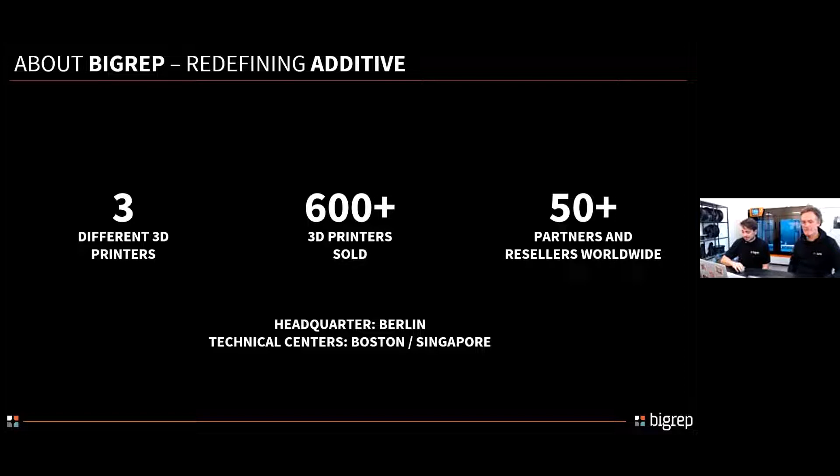First of all, we'd like to talk a bit about BigRep in general. BigRep currently has 3 printers out there in the market, and we have more than 600 actually sold, with around 50 plus among partners and resellers around the world. Our headquarters is here in Berlin, and we have another office in Boston and one in Singapore. So I would say we're pretty global.

About the products, for people who couldn't make it to Formnext, that was visible at the booth. We have, as mentioned, 3 products, but we've developed them for 2 different users. We have the innovation product line with our BigRep One, which during Formnext we presented the 4th generation of. It's not going to be the topic of today, but it's a machine of still 1 cubic meter, very much used for prototyping, for sand casting, for concrete formwork, for people really starting into large-scale 3D printers and trying to bring this technology into their manufacturing process.

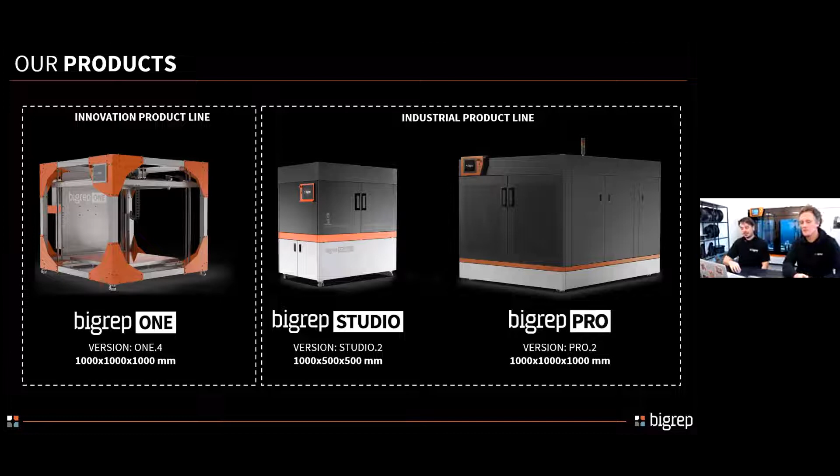On the other side, we have 2 products that are similar but different: the BigRep Studio and the BigRep Pro. The BigRep Studio has a 1000 by 500 by 500 millimeter build volume, so we're talking about 1/4 of the volume of the Pro. Then the BigRep Pro, for which we also introduced a new generation at Formnext. So we're talking about the 2nd generation of the BigRep Pro, again 1 cubic meter, and it's going to be the topic of today.

There is probably no better way to introduce a new product than with a video. So first of all, we're going to show you the promo video that we used to launch the 2nd generation of the BigRep Pro.

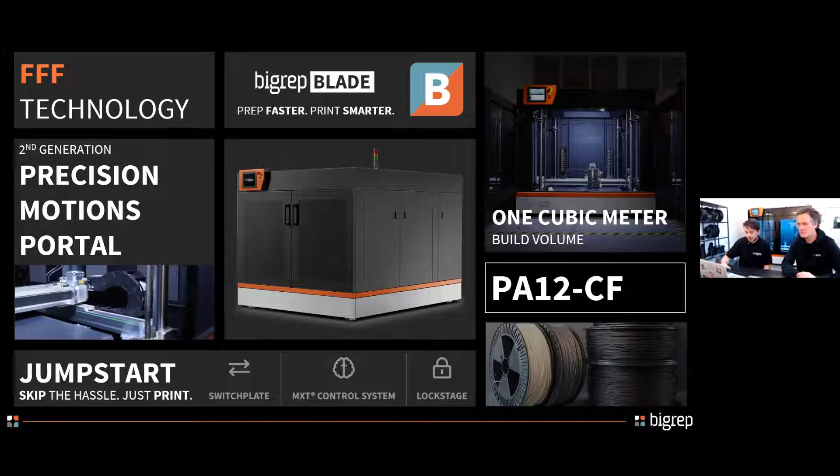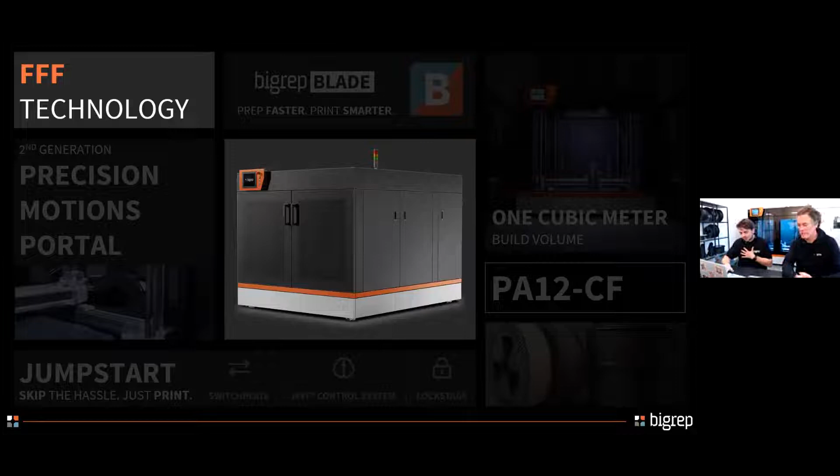First of all, the most basic: our technology is FFF. As you might know, additive manufacturing is pretty big, and there are several technologies out there. The technology we use is FFF, so we basically work, first of all, only with polymers. We're talking about thermoplastic, and we work with layers. So it's an additive technology, and we extrude layer by layer the parts that we want to manufacture.

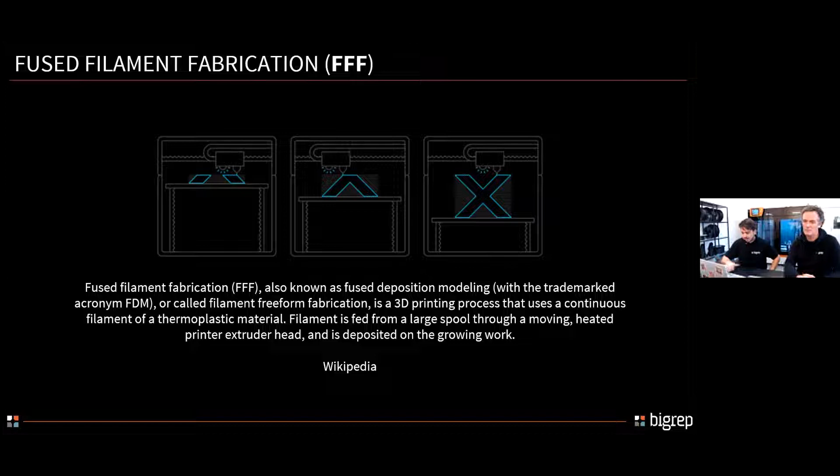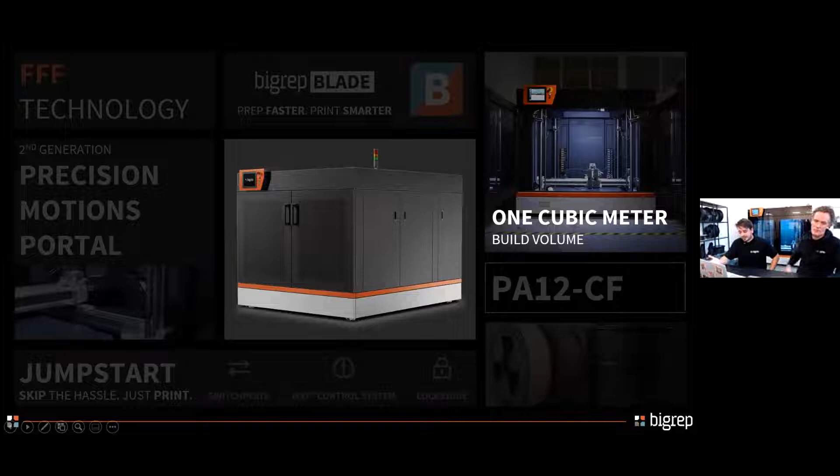Getting into a bit more of the actual spec of the machine, one of the main features is definitely the 1 cubic meter build volume. It's pretty unique, it's big, and it helps us do a lot of things—not just print large parts, but you can also really print batch production, so you can print a lot of smaller parts.

And this gives you a lot of flexibility, right? Because you can really use this agile hardware as you actually need. We focus on different targets, but the industry is so big that at the end of the day, there are always people that come up with new things, and we discover new things with new customers every time.

But we really focus on prototypes and functional prototyping. But not just that, also one of the biggest applications for this machine is actually tooling, jigs, and fixtures. So in the world of automotive, having this machine on the shop floor can really change things, can really speed up the process. And I'm talking about several things, not only jigs and normal fixtures, but also quality assurance, CMM. There's a lot of things this machine can print and support with.

There's also patterns and molds in different industries, so it's pretty generic, but of course, like we mentioned before, you can also print patterns for sand casting or concrete formwork. Here you can push a bit more thanks to the special materials this machine can print. We can also go into the world of carbon fiber, so we can print molds for laminates, or print plugs to then make laminates, molds, glass fiber, etc. And then there's the whole end-use part, as you can see in the picture.

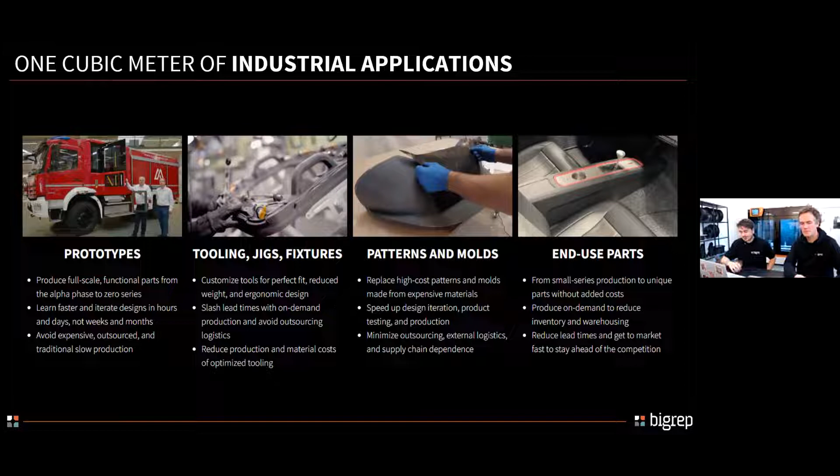Here's just a picture of one of these huge smart fixtures from one of our customers, WAT. It's one of my favorite pieces. Actually, with this one we exhibited at Formnext as well, because it's really a tool that's very complex to manufacture otherwise. So here it embraces all the potential of this technology combined with large scale. This is a smart fixture because it combines not only the parts itself, but a lot of probes, to make sure that the frame where this part is used actually respects the quality enough to not stop the work process, right?

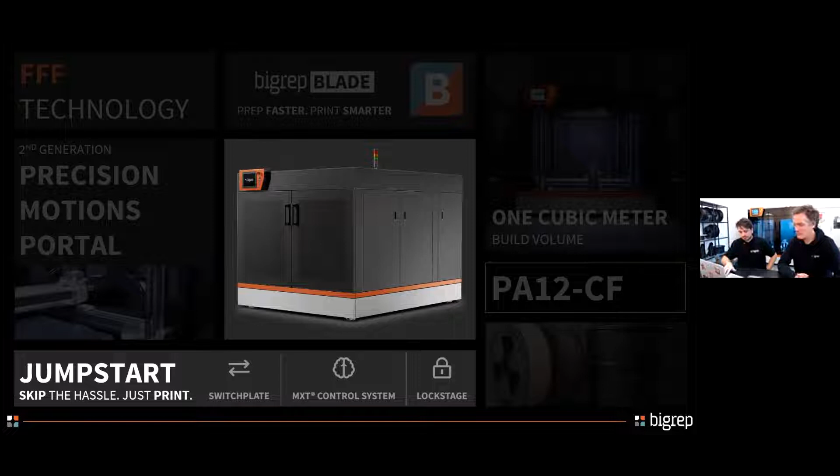Let's then go to the new features of the Pro as well. And here I pass the word to Jan. Thank you, Marco. I'm quite happy to talk about the new features. We were really busy in the past months, half a year and more, to make the Pro a lot more usable, a lot more accessible. And we created what we call JUMPSTART. It allows you to skip the hassle and just print. To achieve that, I'm going to talk about three main aspects which we focused on.

The first one is what we call the switch plate, and you saw that in the video before. That is a surface that helps us have a nice process for having the part on the surface and for part removal.

On the right side, you see the lock stage. Lock stage is what allows us to fasten the extruder to the portal, the moving part, and move it in the build volume. And in the middle is really the brain of the whole thing. We call that the MXT control system. That's where all the algorithms, all the magic, all the sensing, adaptation to the printing happens. We're going to go into some more detail here.

Again, why are we doing this? It's really about dual extrusion. Dual extrusion is the most challenging of applications, but it's also the one that makes for the most versatility. Without dual extrusion, you cannot print with support material, and then you have to design for AM. While we want people to understand that design for AM is very important, there always are applications where you just have to be able to print your injection molding part, or the part is very complex, and having easy dual extrusion here gives you a very high design freedom for your part.

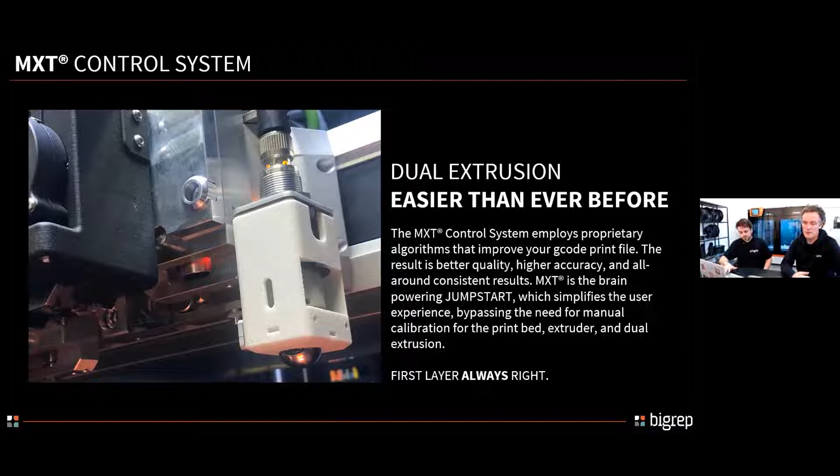There is the switch plate aspect of the whole process, which is interesting in so many ways and improves usability a lot. Before, we had a system where you had to actually apply glue to the build plate before you printed, and it was messy and not very nice.

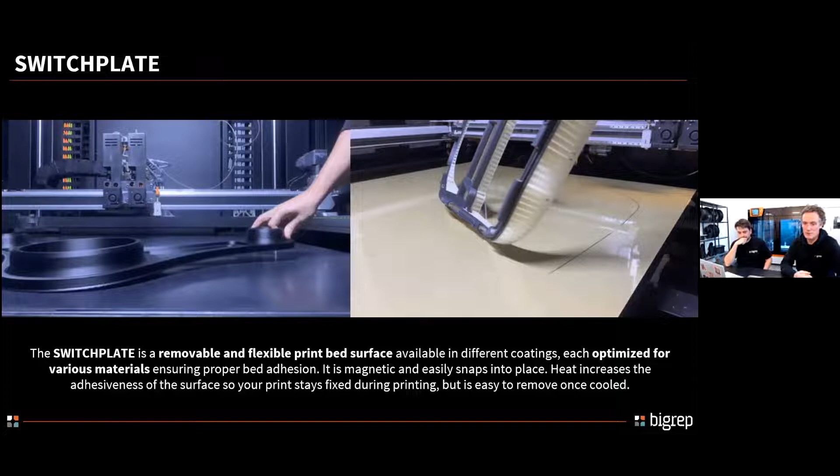Now we have a print surface that has the amazing ability to, when it heats up, become sticky, and it allows the part to stick very strong to the build surface, which makes sure the part doesn't warp, and both the support material and the actual material stick to it really well. As it cools down, at the end of a print, it loses this feature of being sticky, and you see here, you can just lift it off the plate.

All you have to do is lift the plate at the corner a little bit, and that essentially pops the part off the plate, and you can just take it out.

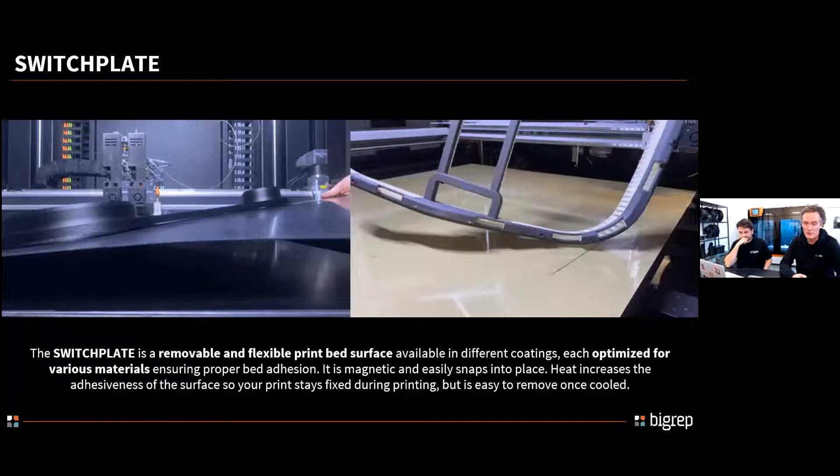This is a big time saver. It allows you to skip a lengthy process of part removal. The whole thing is a lot cleaner. You don't have glue sticking on the surface that afterwards you have to remove. Also, more often than not, you can destroy the part while trying to remove it. Little parts break off, and here it just pops off.

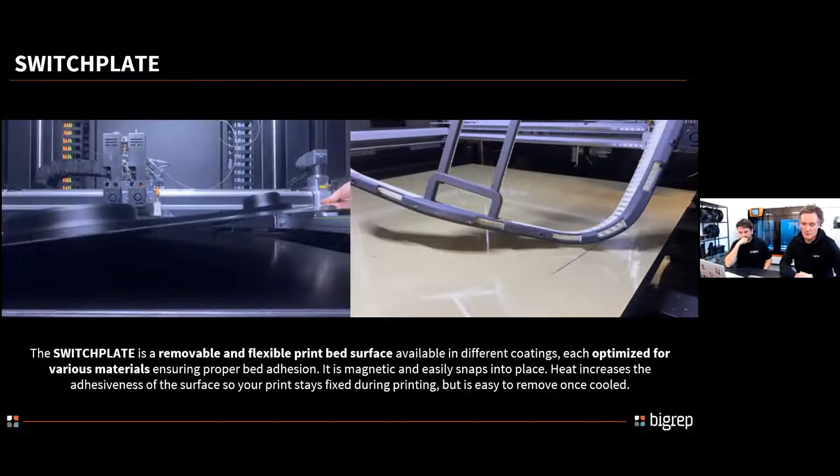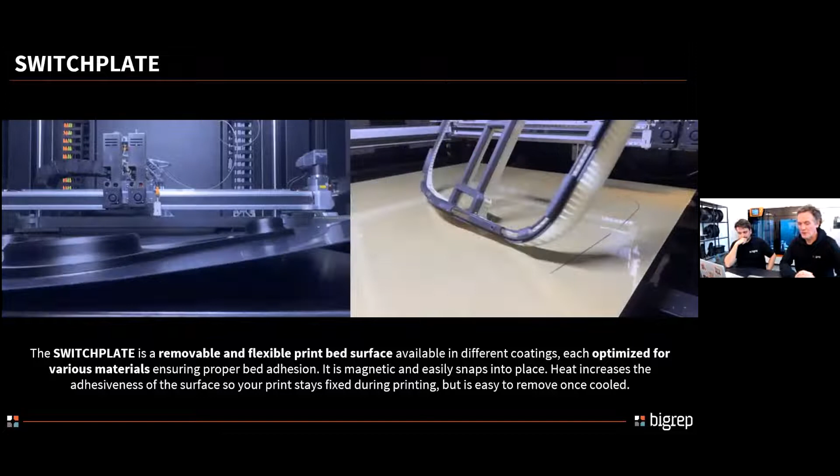What you see in the video is a part printed on the right, I think in high temp CF material, but the thing I want to point out is that the support material is actually water soluble. So in this case, you could break it off easily at the bottom, but if you have more complex structures that are not so easy to reach with tools, water soluble support is really what we want.

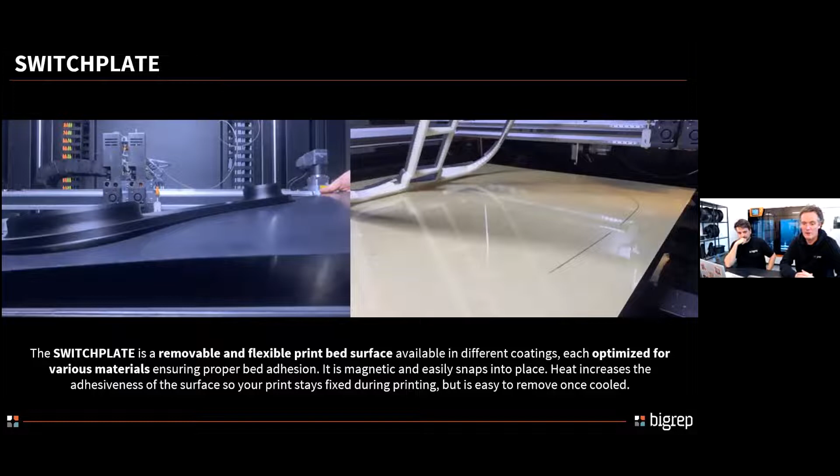And there's a lock stage. For dual extrusion to work perfectly, you need a highly accurate portal, and the way the extruder is moved in 3D space has to be super accurate, especially when you do dual extrusion, where one extruder is essentially printing right next to or on top of what the other extruder just printed.

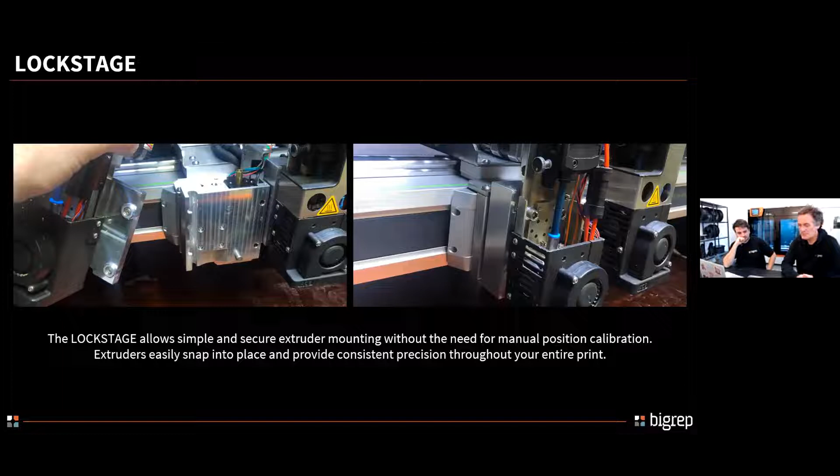And therefore, we developed the lock stage. The lock stage is a way for placing the extruder on the portal and replacing it if needed, and it ensures that the positioning in space is highly precise. You see it's precision machined aluminum here in the back, and just from the way that it's mounted, you already get a very high precision. I will show the quality.

Do we have more? Yeah, let's. I'm going to want to. Do we have a sensor picture?

No, okay. I'm going to talk about the MXT control for a little bit here. MXT control is the control system, it's really the brains of the whole thing.

So there are algorithms in there that ensure the material is placed at very high precision, so the machine basically doesn't require any human intervention and very little setup. We don't need an operator anymore that goes through a lengthy process of setting up the machine, cleaning the build plate, setting up the extruders. The machine does everything for you.

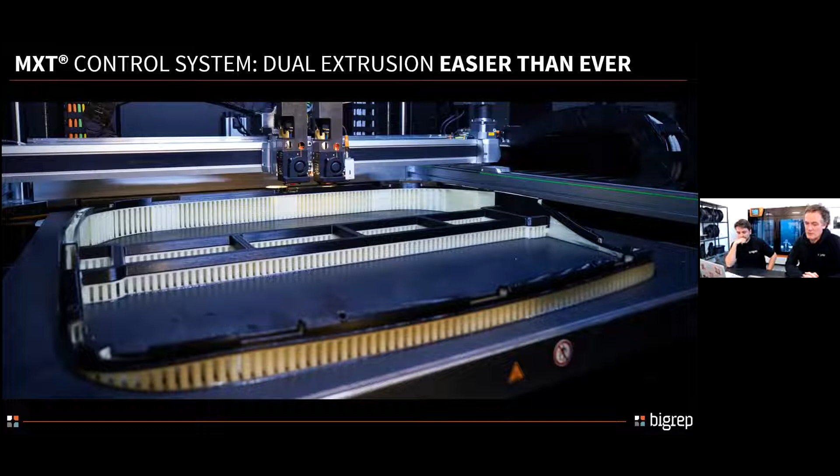We achieve that by having the MXT control system. It is built around the industrial Bosch components that we're using, but we've put a lot of really smart things into it, and that really makes this dual extrusion experience a lot smoother. You can see here the quality that we're achieving. This is a very complex part that we printed, and it wouldn't be possible to print many of the features without support, but it came out super nice.

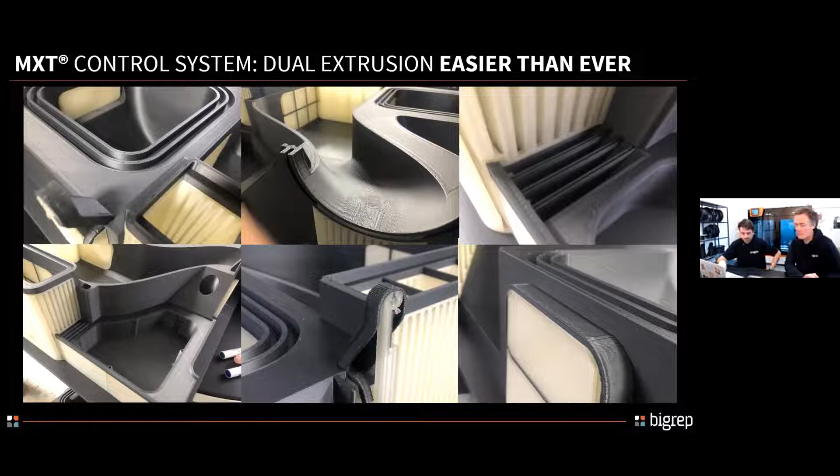And yeah, it's beautiful that you bypass the whole manual calibration. At the end of the day, it just goes like you say. It's wonderful.

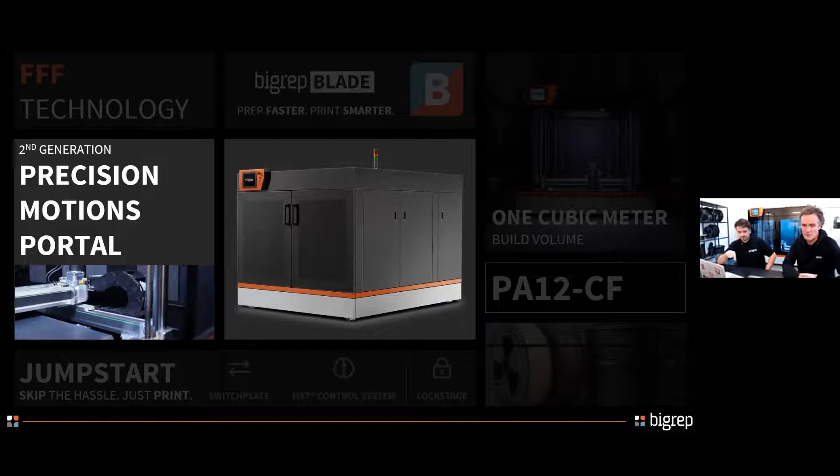Let's also talk about the Precision Motions portal. That is here, next one please. It's the second generation, so this is really the biggest change in the machine that you can see beside the MXT controls. This is the physical manifestation of the precision.

We wanted to achieve a system that is very precise, and the Precision Motions portal helps us there. We made it even stronger than before. It's built around Bosch Rexroth components. The motors, the control system, everything is industrial grade, including safety mechanisms that ensure it stops when you open the doors.

And this keeps vibrations to the minimum. Vibrations you can see in the print result, and that's why it's important to minimize them. It's the part that moves the stage and the extruders around, and it is able to do that at much higher speeds than the previous generation machine.

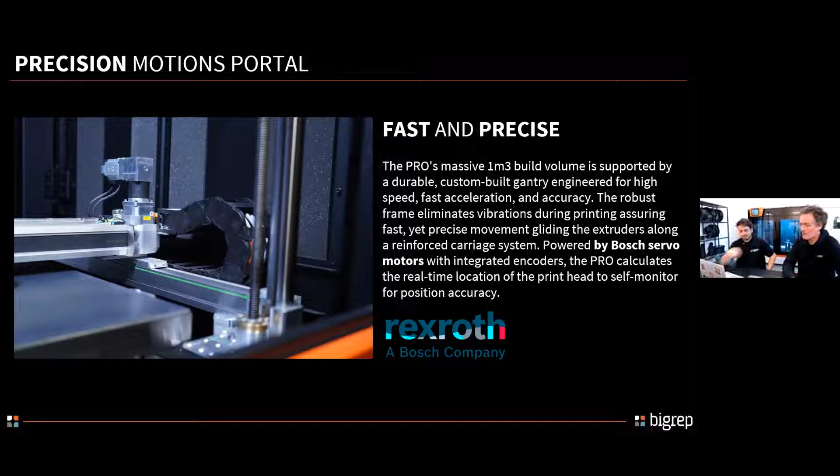And all of this, in the end, translates into achievable accuracy of the part. For the BigRep Pro, we have an achievable accuracy of plus minus 0.2 millimeters. That is very much up there in the ballpark of what other high-end competitors are offering.

There are machines that are a little bit higher in their achievable accuracy, but they also cost a lot more. This is also something that we're constantly improving.

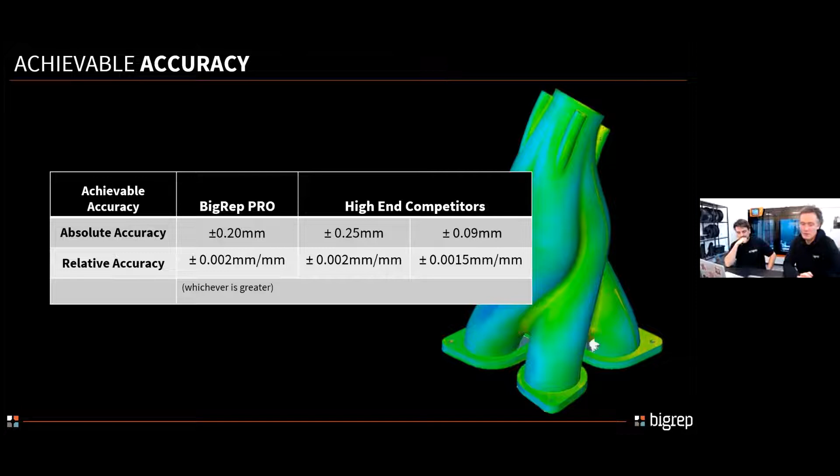The specs which make this possible for the Precision Motions portal is an acceleration of 2 meters per second squared, which is up from what we had before. The control system has an accuracy which is even higher than what we just looked at, and the whole system also has a really high repeatability.

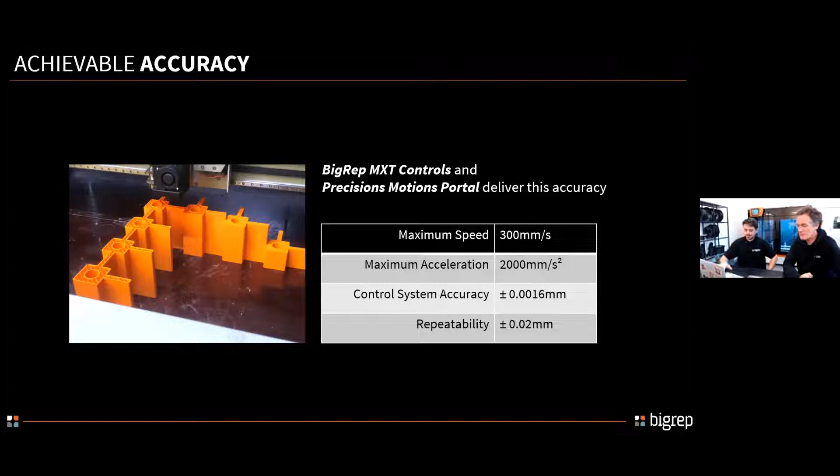Before passing through, I loved how you call it the physical manifestation of precision, which is a very accurate way to describe the portal. You're gonna see it after, but it's definitely beautiful.

About the whole JumpStart, I think it's really amazing how you guys actually solved a lot of the things that, at the end of the day, users want. That's what you really focus on. People realized also, seeing it at Formnext, how easy it was to just start such a dual extrusion complex print in a matter of minutes, because the machine does it.

And then the pop-off, which maybe we saw already with desktop printers out there with a flexible plate, smaller scale, but when you see it in large scale and behaving in that way, it's just beautiful. The part just pops, and you take it off and it's ready to start the print again. People are like, wow, that's definitely impressive to see.

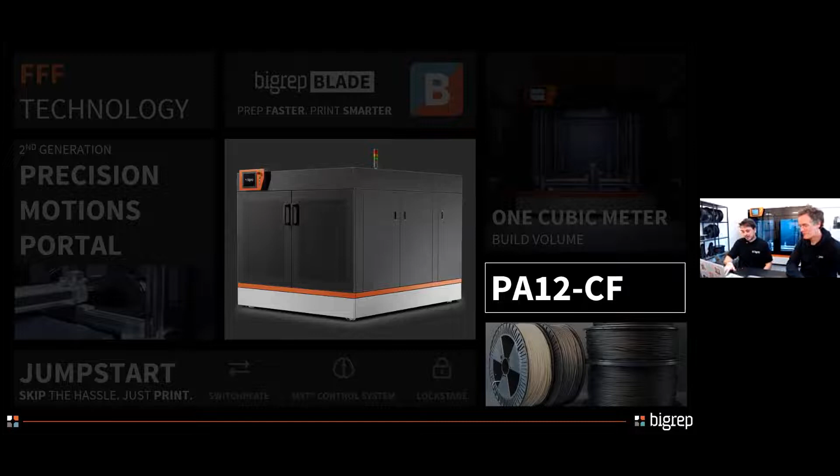But that's not all. We also have a full new material that comes now with the Pro. We're talking about PA12CF, which was a material really requested by our users, so we really focused on this one. As with the machine itself, we have a video in BigRep style to introduce this material. So enjoy it.

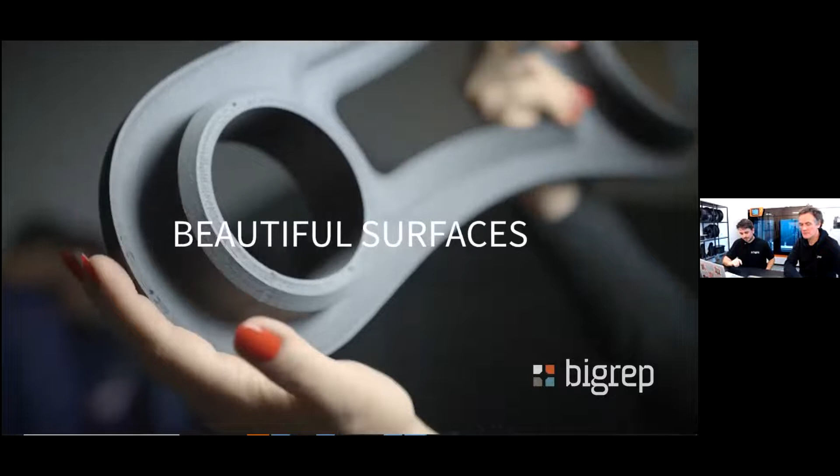This was definitely a challenge accepted by multiple people, because at Formnext, multiple people came with the idea of, hey, I want to try to break it, and nobody could. That specific part ended up with a lot of people smashing it on the floor loudly and hardly. Absolutely nothing happened. There was a little delamination on the corner, but people really pushed hard. Then we had to stop because security didn't like it, but it was definitely fun.

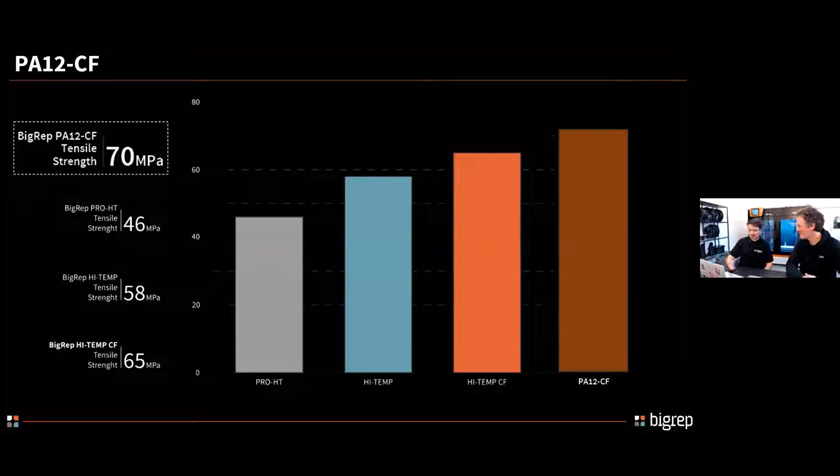This material is amazing, guys. You can see already here just a comparison with our portfolio. People might be familiar with our ProHT high temp or high temp CF, which are materials already out there. The tensile strength is going up, and it's just very strong.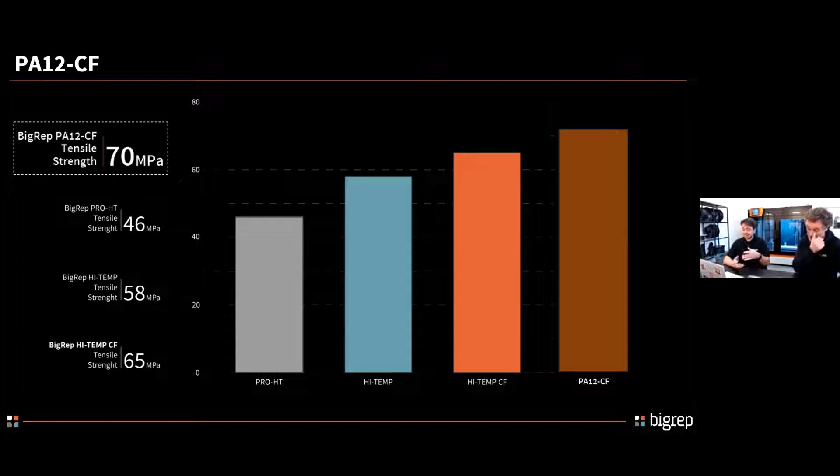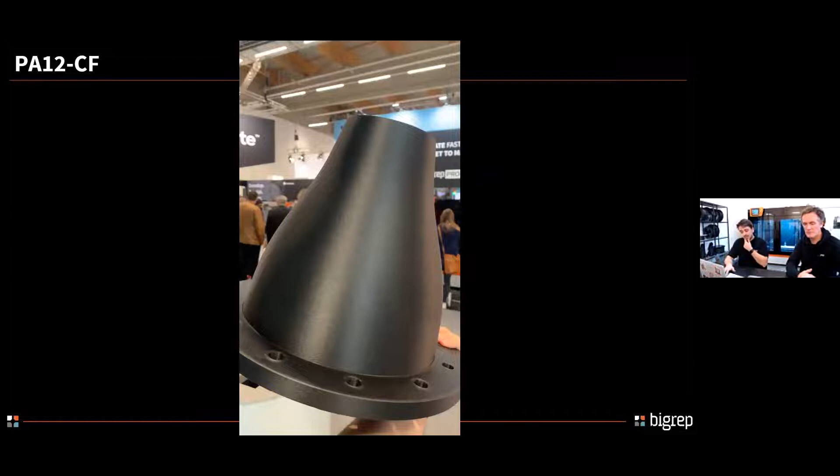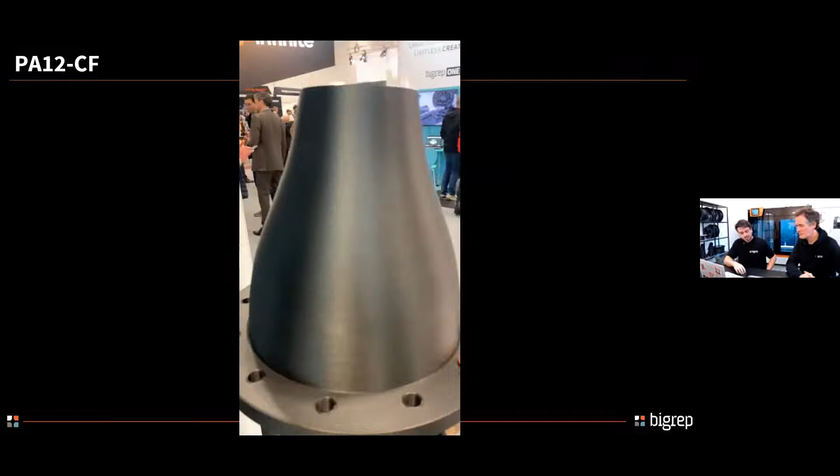It prints super well, and the surface quality is just insane. We had this part which we showed at Formnext as well. I'm gonna just turn on the audio because I didn't know how to do it on the PowerPoint. Here you can see a bit of how the surface looks like. The video, I hope, actually gives a real sense of how it looked.

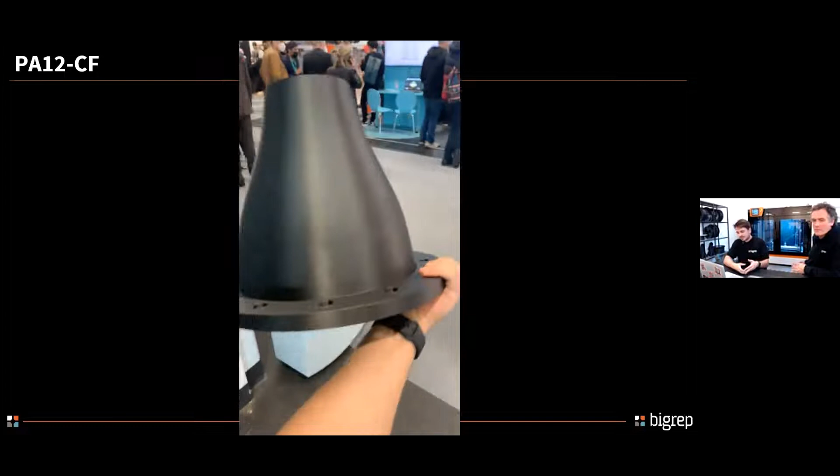It was beautiful to see. Several people came and asked, oh, what did you use to post-process the surface on this part? Did you guys sand it? Did you guys do tumbling or whatever? And I said, no, this came just out of the printer like this, and people were like, oh my gosh, this is impressive. I mean, it's a large scale printer.

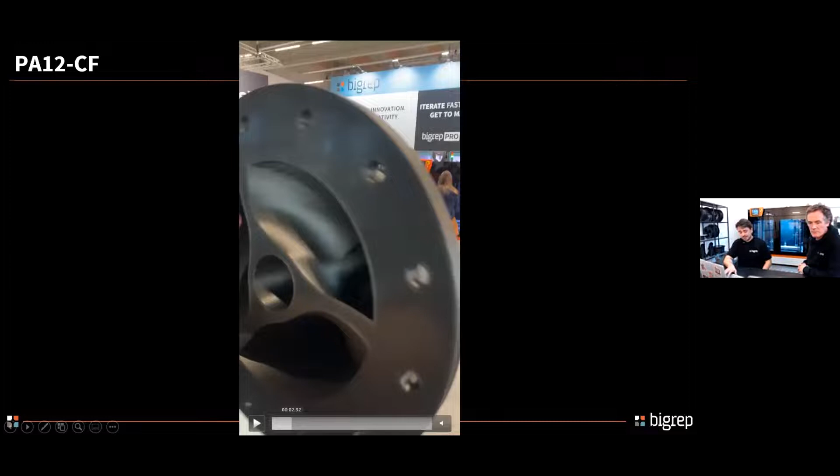We're not even talking about small nozzles, it's not 0.3 or 0.4, it's a 0.6 nozzle with a 0.3 layer height. The print you see there is about 3.5 kilos and took 48 hours, again with a 0.3 layer height. So even the speed and the output, here you see all the things that Jan mentioned before.

Among the ones you see are ASA, PETG, and PA66, which we printed at Formnext. We had live prints for six days in a row in dual extrusion with PA66 and BVOH, the water-soluble solution we offer, running smoothly without any issue. It's just beautiful, because that's how it's supposed to be, right? That's what we focus on: making it simple and easier than ever.

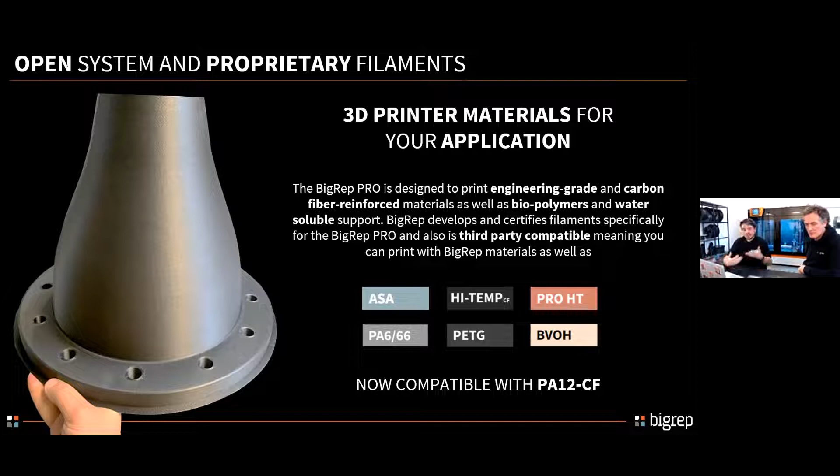The last thing I want to go through - everything is amazing, hardware and software solutions inside the machine, but there's always the stage of, from my CAD file, how do I get my printed part? That's where Blade comes in. That's our proprietary software for slicing.

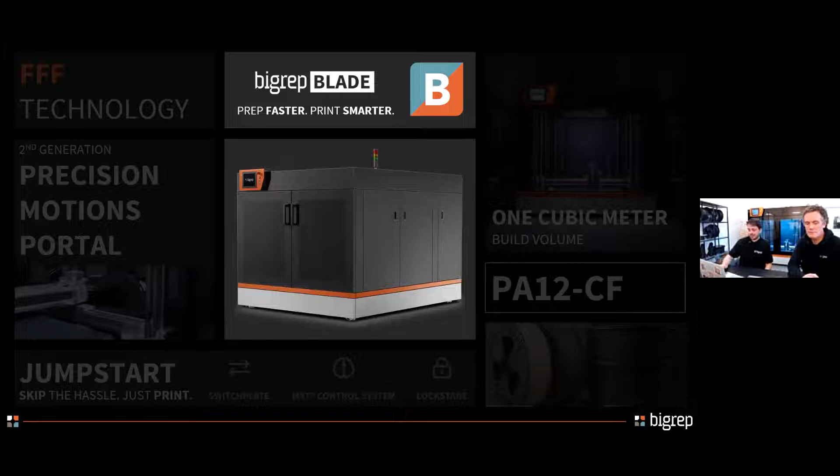It's really built to make large-scale printing easier. When you go small desktop, you have fewer things to consider. When you go bigger, there are more things you need to consider, and Blade really helps you make it happen. First of all, it's super optimized for large scale, even engine-wise, so it slices fast even with meshes that have millions and millions of faces.

But not just that - as mentioned before, big printers isn't just about big prints. It also means a lot of smaller prints, and here is where Blade comes super handy. It has a lot of functions to simply drop in a part and multiply it to fill the bed for batch production.

Printing multiple parts isn't just about printing them all together at the same time. With a large-scale printer, you can print several parts on the front line, then go backward and start printing the second line once the first is done. This helps because when the second line starts, you can pause the print and take off the parts already finished. You don't need to wait until all the parts are done, which is super handy if you need to rush a production.

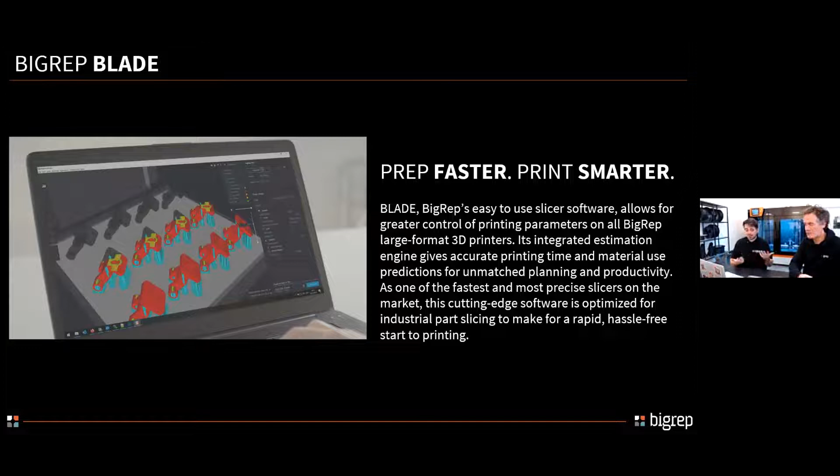This is a bit of the interface of Blade, and Blade is completely free. You can just go to bigrep.com/blade, download it, and start playing with it if you're familiar with slicing in general, so you can check it out a bit.

You can run some simulations. You'll find all our machines - the Pro, the One, the Studio - they're all there with all our materials, all the profiles, and different layer heights, so you can really run simulations.

If you're not familiar with slicing, well, of course, we offer these beautiful training videos. They're free, they're there, and if you watch both of them, you'll really become a 3D print expert, which is pretty cool.

Last thing, let's go through the specs. Let me highlight some things I maybe didn't talk about in too much detail before. One is the extruder throughput, which is up to 130 grams per hour, allowing you to print way over 2 kilos per day, which is pretty amazing, I think.

The machines come with extruders that can take a nozzle diameter of 0.6 millimeters or 1 millimeter. The 0.6 millimeter is used with a 0.3 millimeter layer height to produce end-use parts that require high surface quality and resolution. The 1.0 millimeter is for faster prints, usually paired with a 0.6 millimeter layer height.

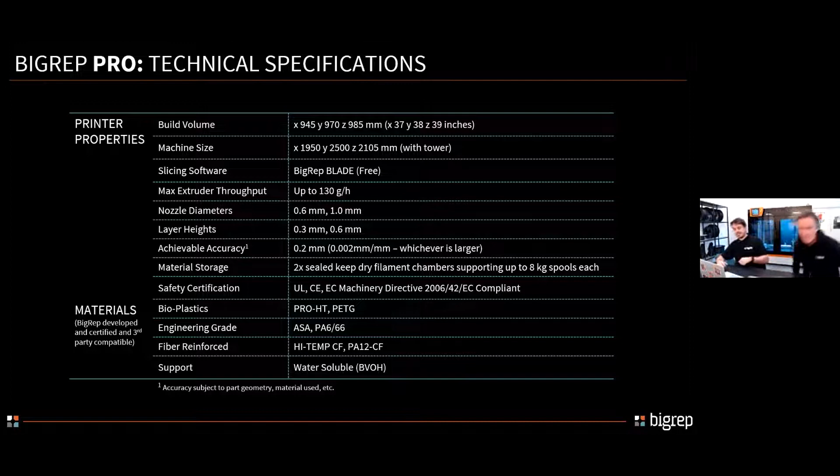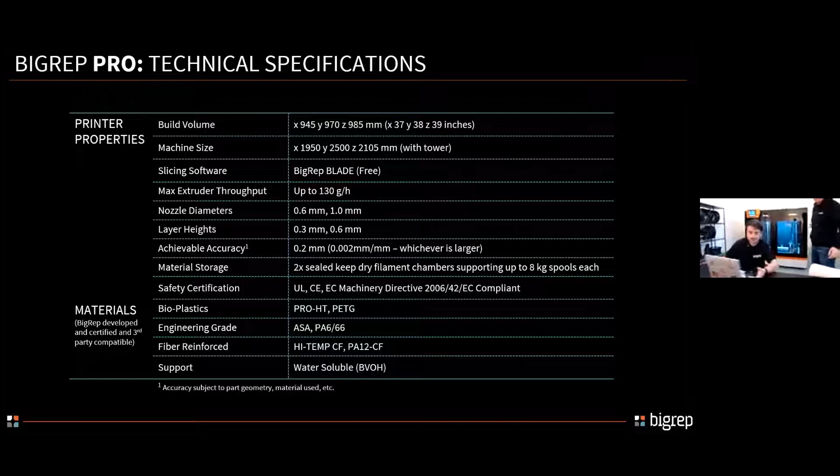Shall we do a little tour? Want to check the printer? Absolutely. Let's grab a bit of support here. I'm gonna take you. Hopla, taking this with us. Let's see. Great. Hopla.

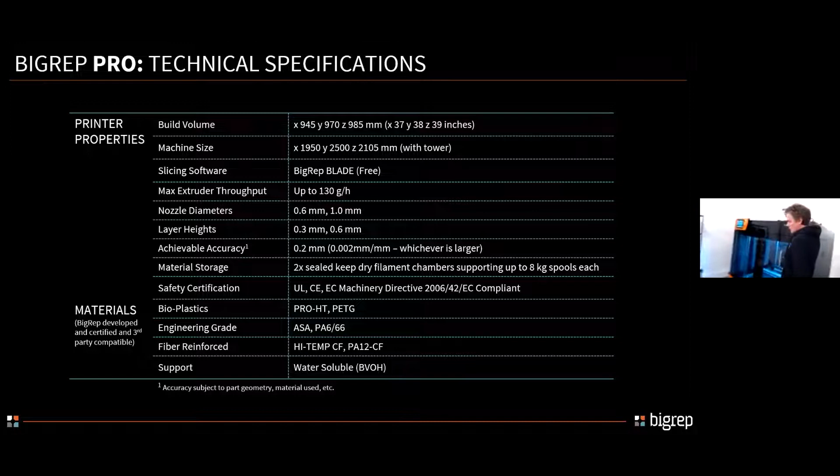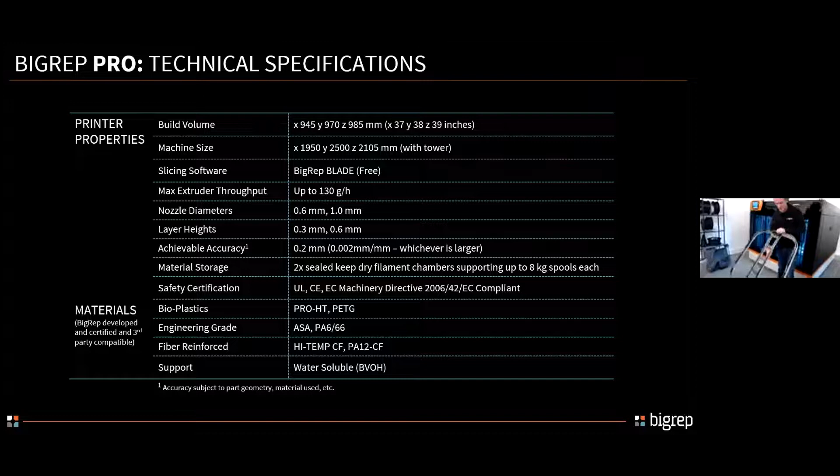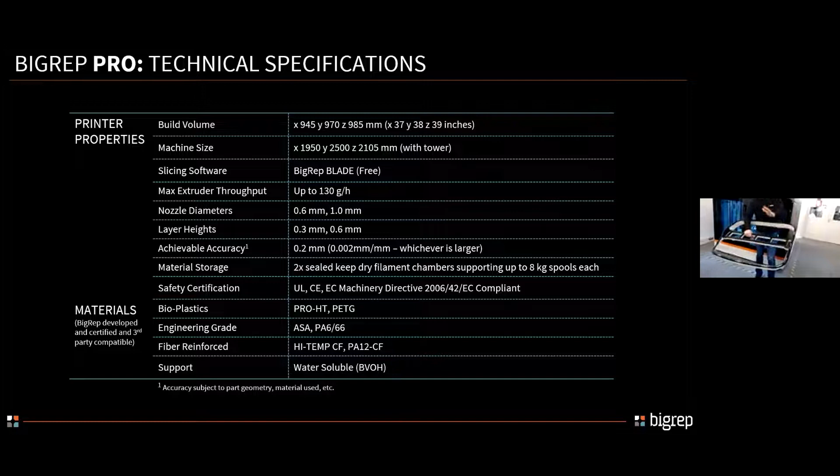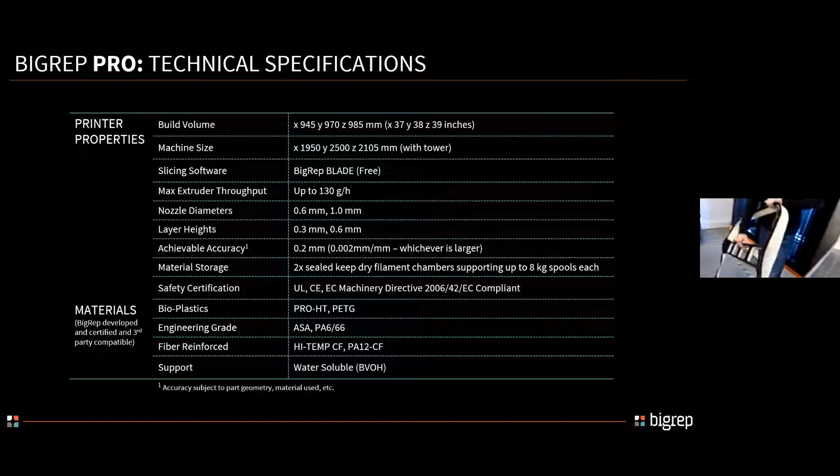So should we maybe start with the part first? Sure, because we were just talking about the dual extrusion and those materials. So what you see here is a fixture that one of our automotive clients is using, and this is printed in PA6/66. PA6/66 has very nice mechanical properties. It is very strong also in the Z direction. Sometimes what happens with 3D printing is you have delamination, but with nylon you really don't have that at all. It's a very shiny material, therefore you see all of the printing.

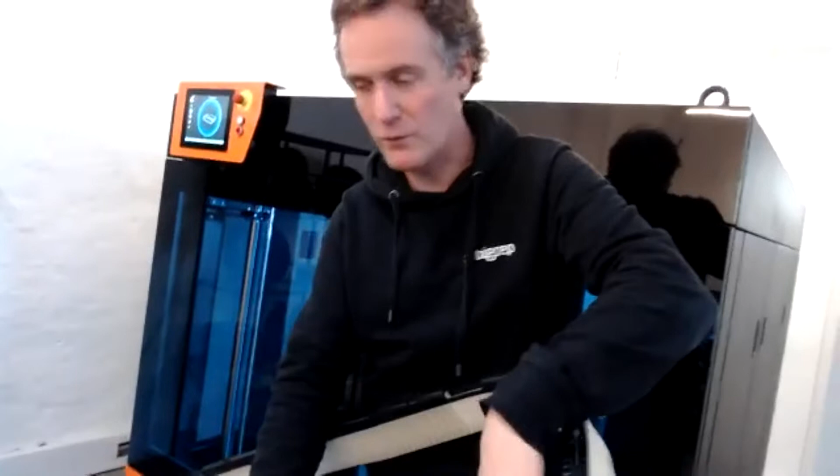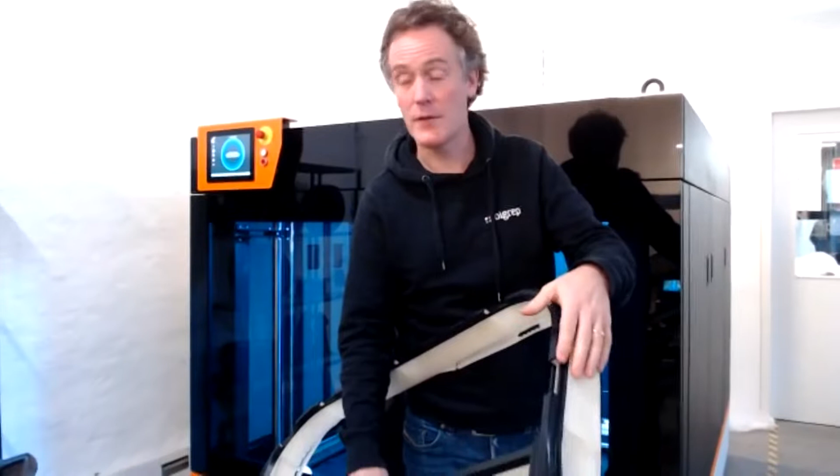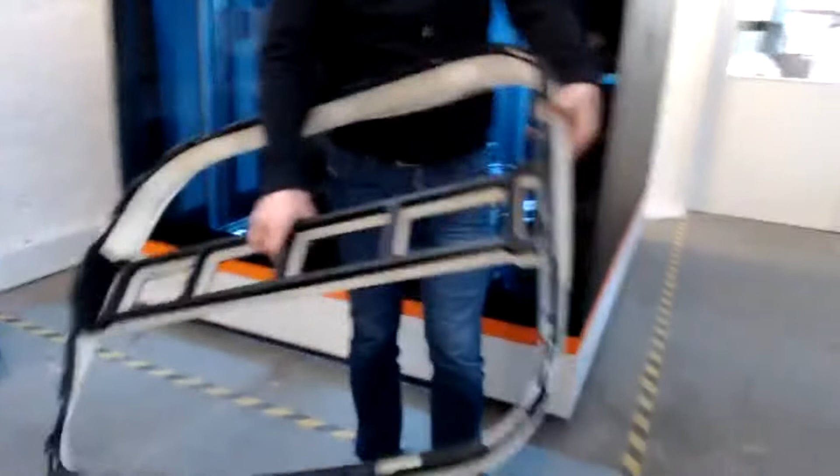We actually like that a lot here. It's very different from what Marco was showing before on the PA12 part - you don't really see that, it's much more matte, a very different finish. But here, this is a jig - it doesn't really matter how it looks. Very high resolution print though.

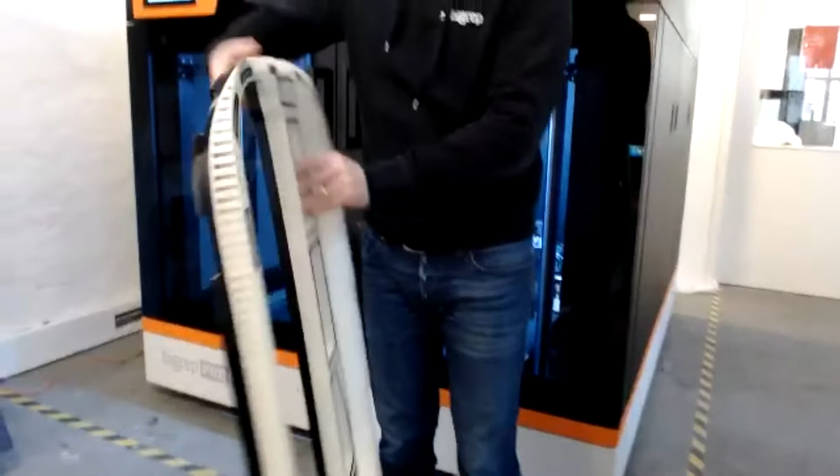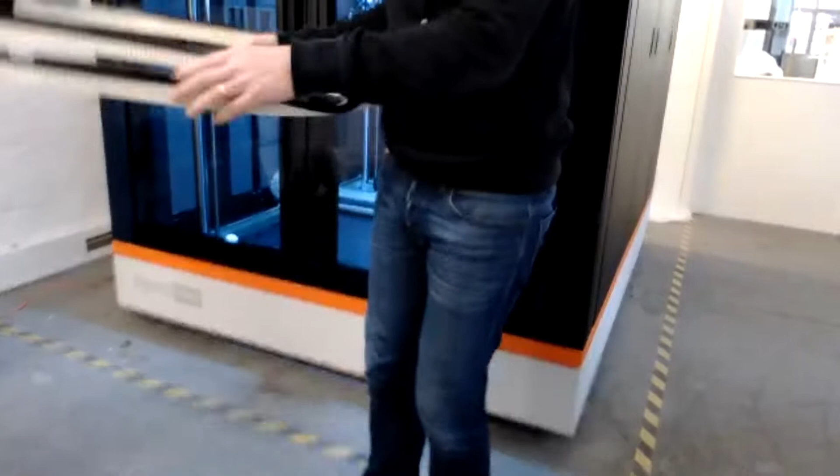And you see here, this is the support material. You can take this off easily - it comes off. And for those parts which are a little bit harder to reach, like here, potentially holes and inserts, you can just submerge it in water and it will come out nicely.

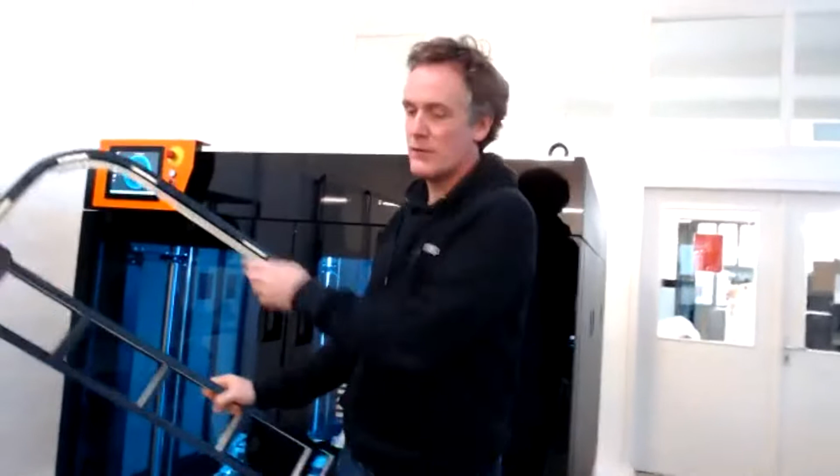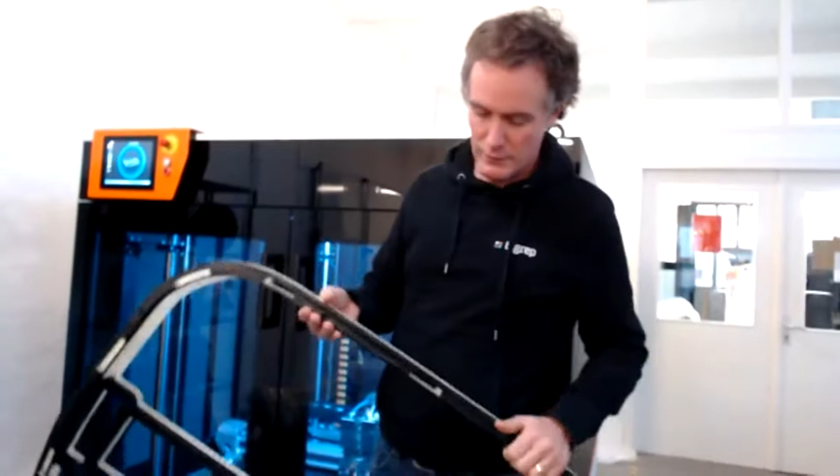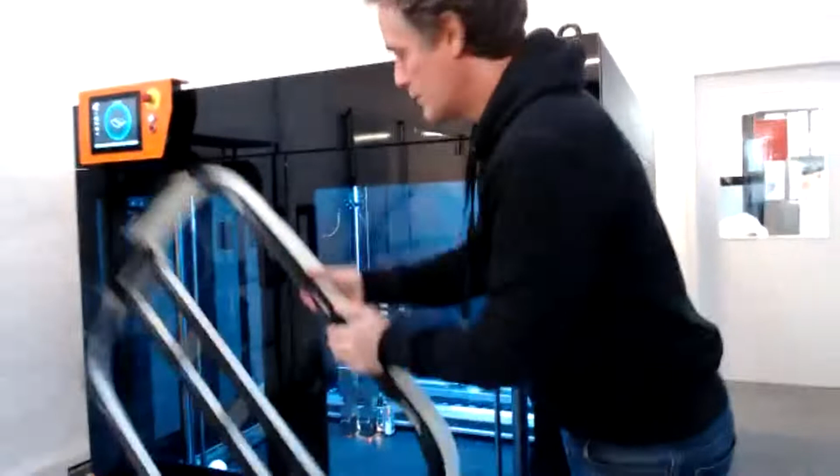This is a print that in that high resolution we printed at Formnext - this is the actual part that we printed there. It took around 4 days - we started the evening before, and it finished while the trade show was still going on. And just before this webinar, we started the print again on the machine.

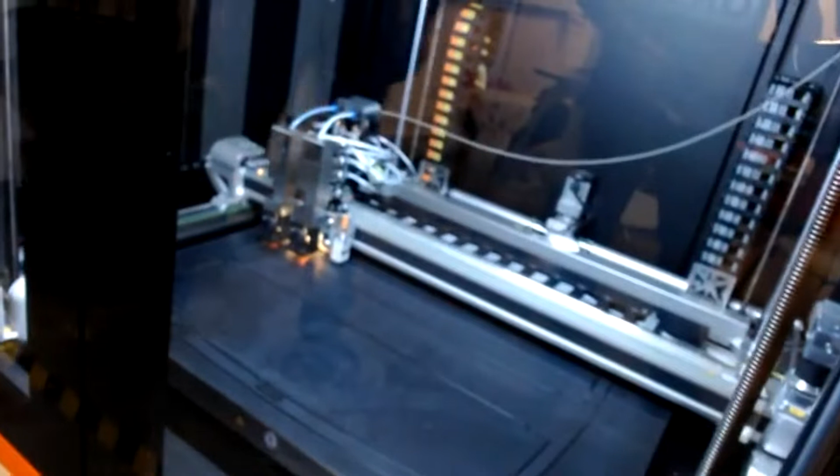And you can see it print the first layer. This again is the machine that was at the trade show.

We had Fernando come in the morning here, set it up. Took about, well, it took a while. The most time was spent collecting the tools for it, to take off all the plastic wrap around it, and the bubble wrap.

After that, the machine was up and running in 30 to 45 minutes, including heating bed and everything. Heating the bed is usually something that takes the most time because this print is running at 80 degrees.

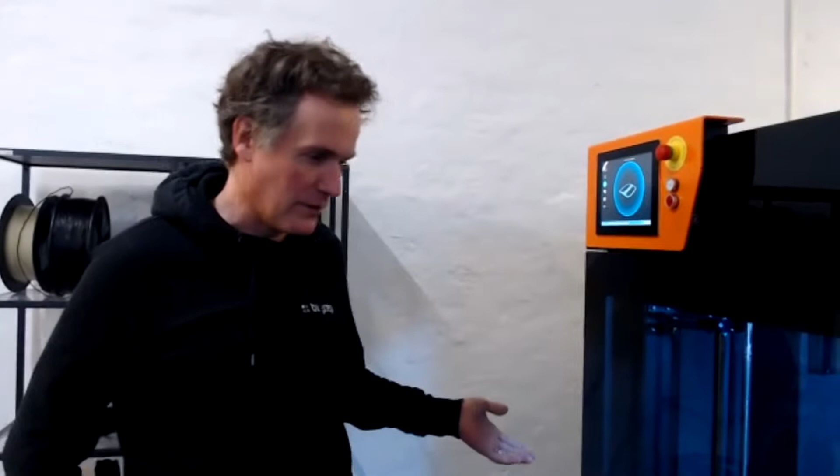And it was just essentially push play. The MXT controls does all the sensing, all the setting up of extruders and parameters by itself, and it's printing here the first layer.

So it's important to highlight that. Of course, it's not just the color; it's because they're made for different materials. The black surface is for PA-based material, and the other one you saw is more for PLA-based material. So you can easily change them accordingly to what you prefer to print.

And here you can see the beautiful portal that Jan was mentioning about. Another nice thing is that there is no front bar, and this helps you even more whenever you want to switch plate. You can easily take it off also from the front door, so it comes super handy for the work process. Again, the whole idea is just to make it easier for users to use.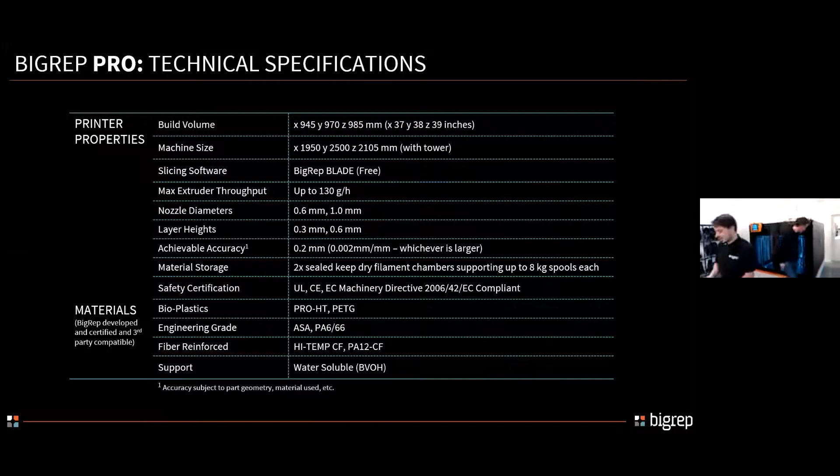Okay Abe, I think I'll pass the word to you again. Yeah, so we did get some questions came in throughout that great overview. And I think it was great, Jan, when you picked the part up, because sometimes pictures can be deceiving. You can't really tell how big the part is, but you're a very tall man and you were holding that part and it looked ginormous. So I think that really helped set the stage there.

But a couple of questions did come in about average cost per part when printing a part. And I know we're not going to talk about the price of the printer; if you want to know that, feel free to send me a quick chat, or we can follow up with you after. But just in terms of cost per part, what's the average range of some of these parts that we can produce?

I prefer you answer. Okay, but it really depends on the size, that's the first thing, and on the application itself, because then it's about the material. So material and size really can change this. But in general, beside the printing time, once you have the machine it doesn't really matter a lot. It's just about the material itself, and the price you can see also on our website. You can find out the price, and that helps you understand more or less how much a part will cost.